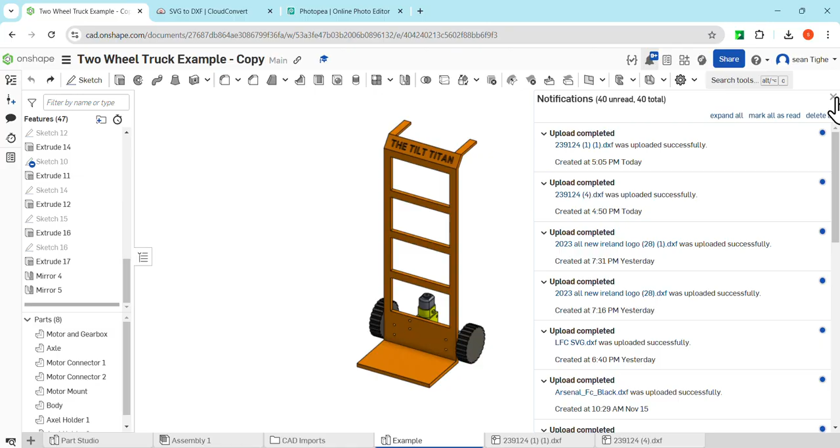And now I want to choose what surface to sketch on. So say I want to sketch on this base here at the bottom. I'm going to right click it. I'm going to press new sketch. I'm going to look straight at the plane that I'm drawing on here. Now, up top, what you'll see once you're in a sketch is insert DXF.

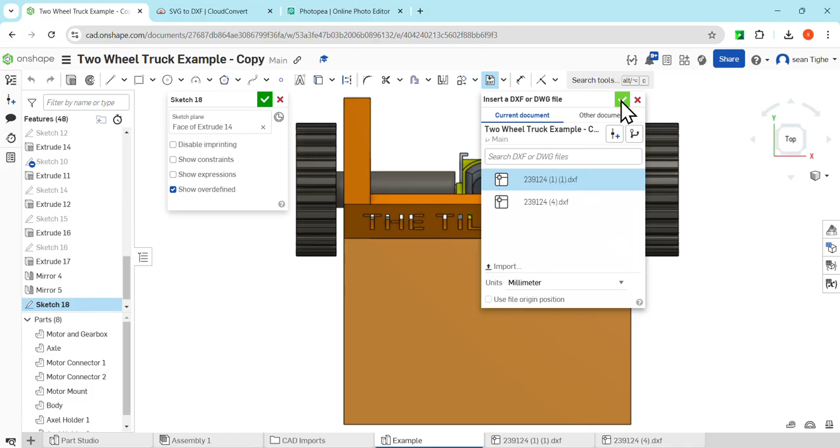So once you're happy with the plane you're sketching on, what you want to do is hit that DXF, choose which DXF you want to draw. Unfortunately, this preview isn't loading here, but I know it is that one, so I'm going to press OK. And what you'll notice now is that the image gets imported. You don't get a choice of where it goes, but you can still choose where to put it.

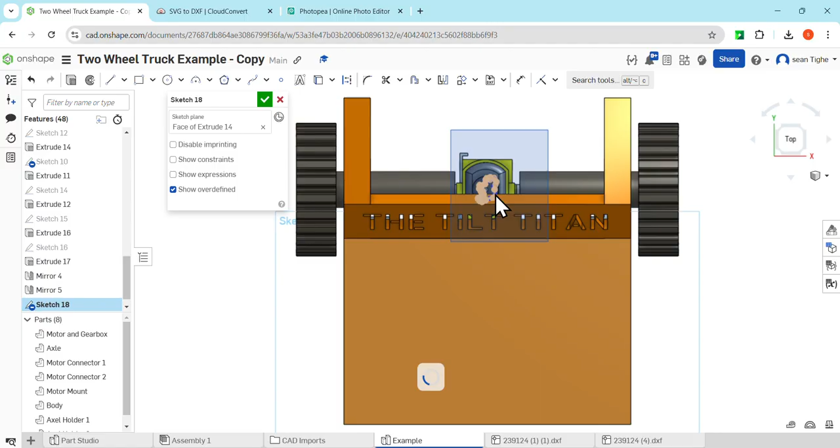So what I did there was I dragged my mouse around the whole selection, and now I'm waiting for the computer to load because there's loads of little nodes in there. It's still quite a heavy image for the computer to load. So I've selected the whole thing, and what I want to do is transform it. If you can't see transform there, it's most likely in a drop down just behind linear pattern. So hit transform, and what you'll see then is this triad.

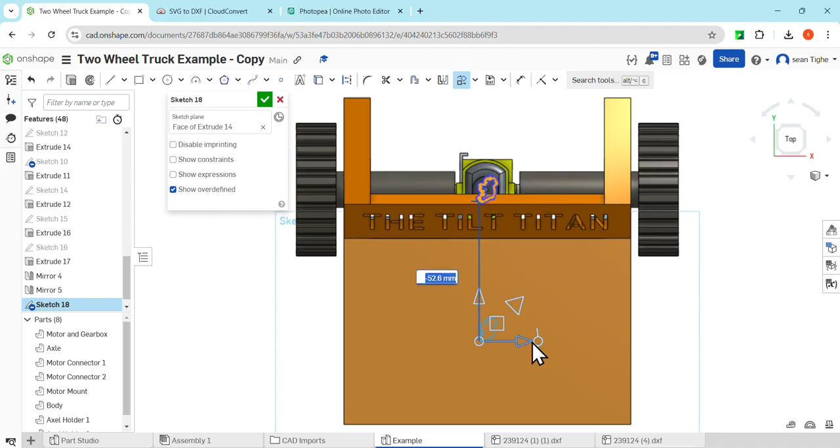So you've got an up arrow, and that'll also bring it down, and you've got a right arrow, and the right will also bring you left. You could also rotate the image. So say I wanted to rotate it a little bit. And this diagonal button here scales the image up or down. In this case, we want to scale the image well up.

Okay, so I'm going to rotate this back into the center. And just a little trick here, by the way: on this dialog box, you can of course type in a value if you wanted to bring that image up or down by a certain measurement, but you could also hover your mouse above that box, and with the wheel of your mouse scroll up or down, and that will increase it by 1 millimeter at a time. So if you want to be super exact and a smooth movement, that's probably the best way.

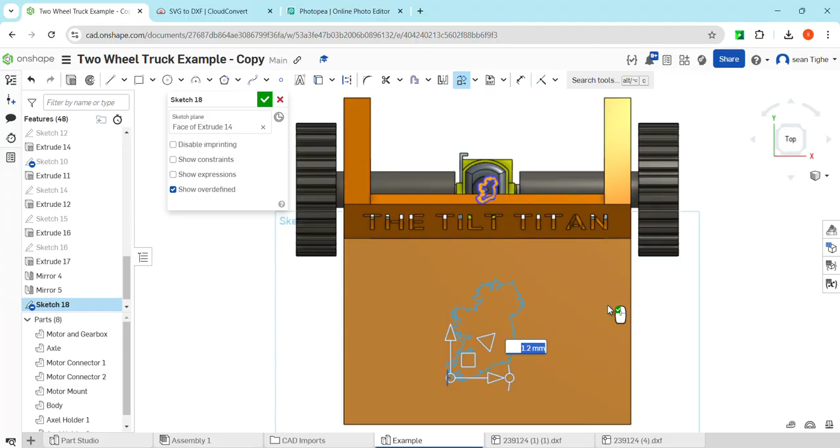So once you're happy with your image, and I am there, well, I might drag it a little bit to the right. Once you're happy with the image though, you're going to left click on your mouse, and that will fix the changes. Okay, so our changes are fixed into position. What do I want to do next? I want to extrude that in this case.

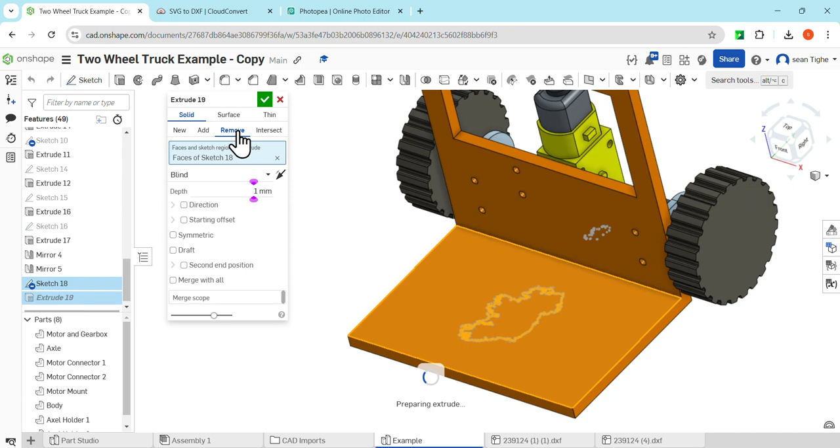This time I'm going to extrude this, but I want it engraved into the surface. So I'm going to set it to be like a 1 millimeter depth, and up here at the top, instead of add, which would basically create an embossment lifted off the surface, I want to remove it from the surface. What do I want to merge it to? Well, it's automatically selected in my case, but if it hasn't, then you want to hit merge down here and select it. The only thing is it's not going the right direction.

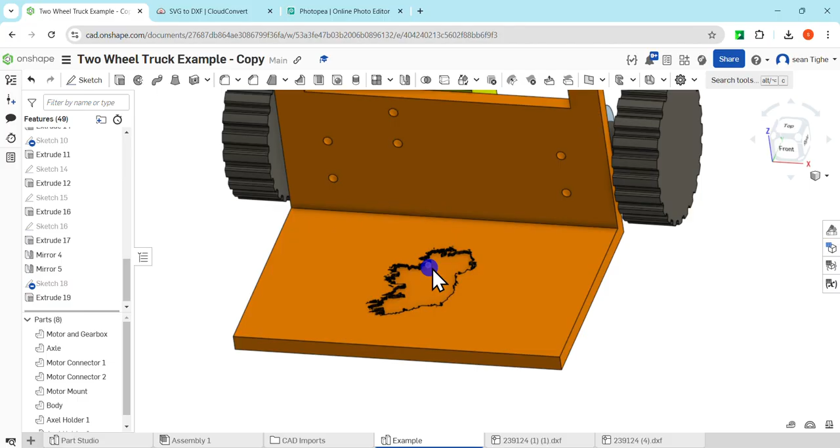Now this is still taking quite a time to load, so I've clicked there and I've changed it back downward. So I'm happy with that. I'm going to press the green button there to get out of that. So that there is how you take an image and you bring it into Onshape.